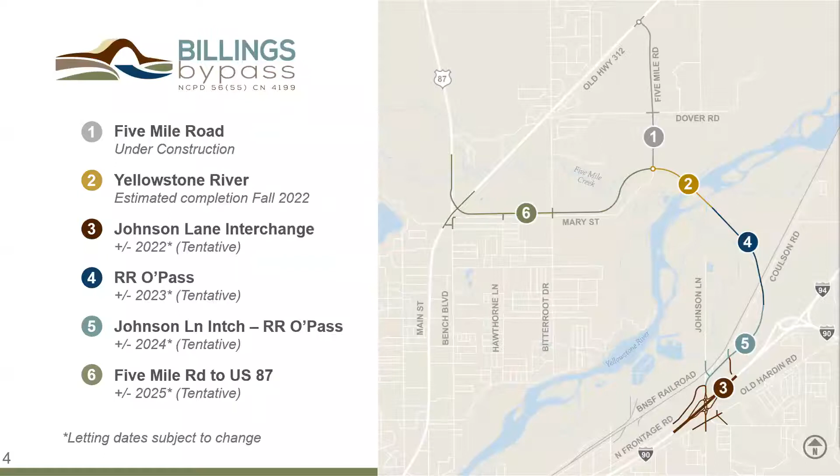As you can see on the screen, the Billings Bypass project consists of 6 individual segments of roadway. These 6 segments are planned to be constructed in the following order. Labeled number 1 on your screen is the reconstruction of 5 Mile Road and its extension to connect to Highway 312 to the north. This segment is currently under construction with Riverside Contracting and is expected to be completed and open to traffic this summer.

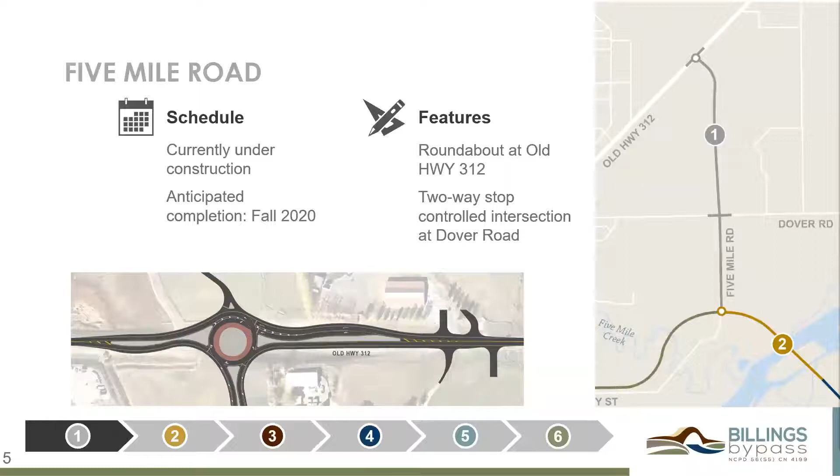The second segment to be constructed will be the Yellowstone River Bridge. This project was just awarded to Wadsworth Brothers for construction. Work is expected to begin on the bridge as early as this August and will take about 2 years to complete.

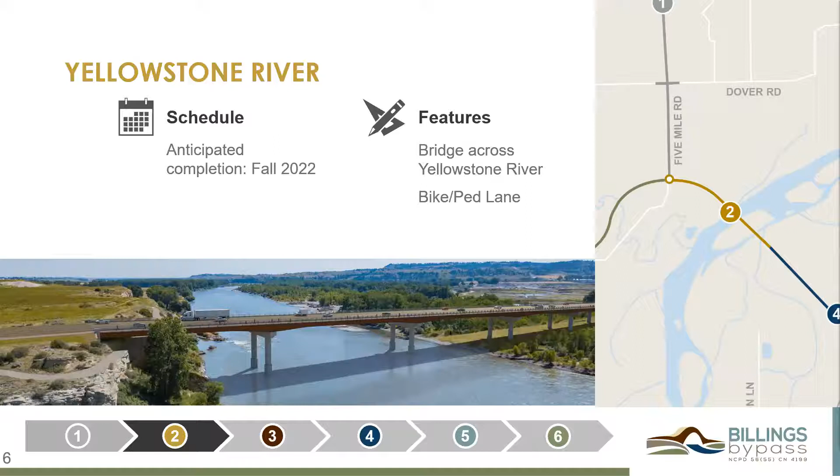The third segment to be constructed will be the Johnson Lane Interchange, with planned construction beginning in 2022. This project will probably last two construction seasons and will feature a diverging diamond interchange design, the first in Montana, but not the first in this country. Doug will speak in more detail on this segment in just a moment.

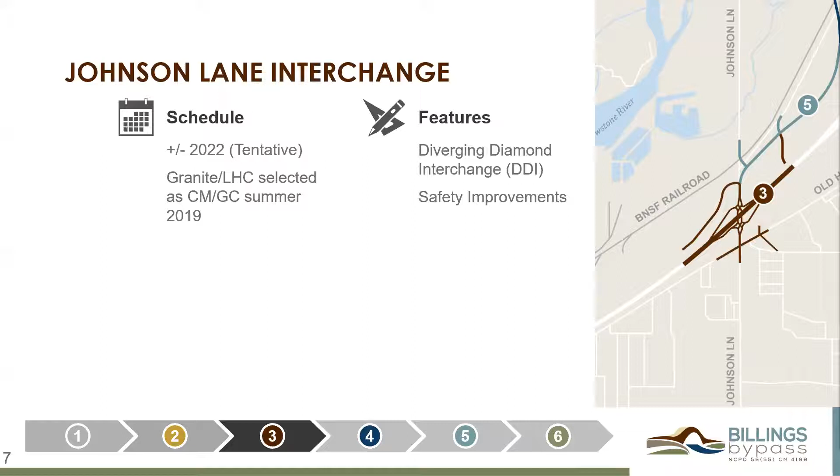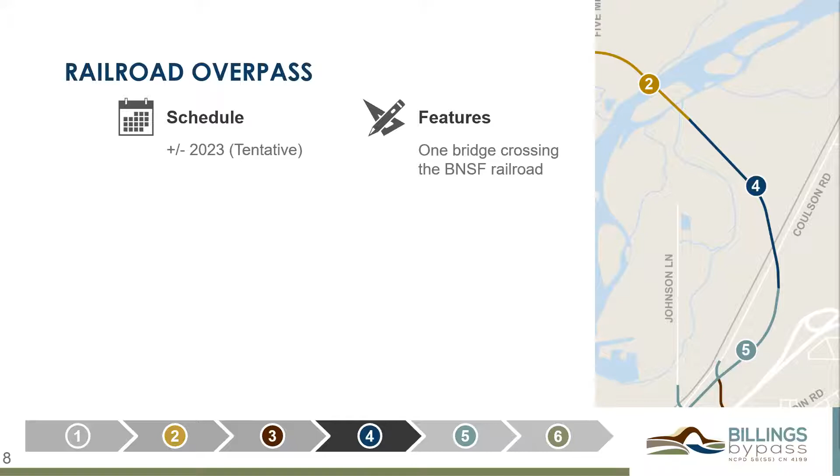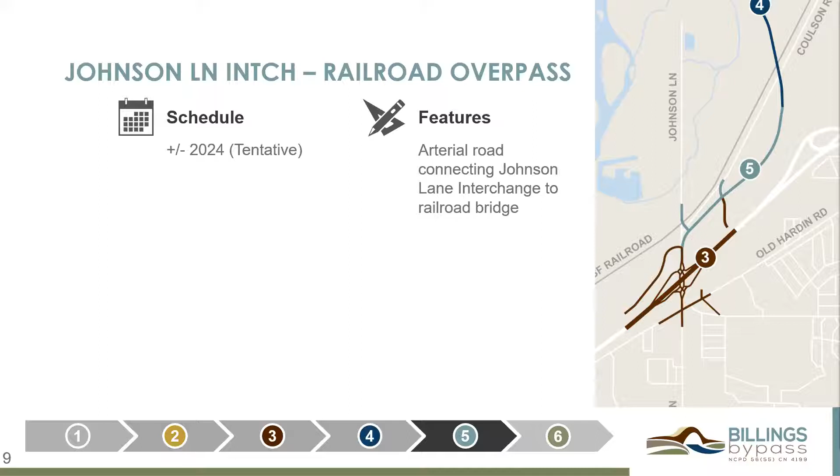The fourth segment is the railroad overpass. It begins on the southern end of the Yellowstone River Bridge and continues south with a bridge over the railroad tracks. We plan on constructing this segment in 2023. The fifth segment is planned for construction in about 2024, after both the Johnson Lane interchange and the railroad overpass are complete. This segment will construct the roadway between the Johnson Lane interchange and the railroad overpass.

And last but not least, the sixth segment. We plan on constructing the segment of the bypass that runs parallel to Mary Street between 5 Mile Road and the Highway 312-87 intersection on Main Street in about 2025.

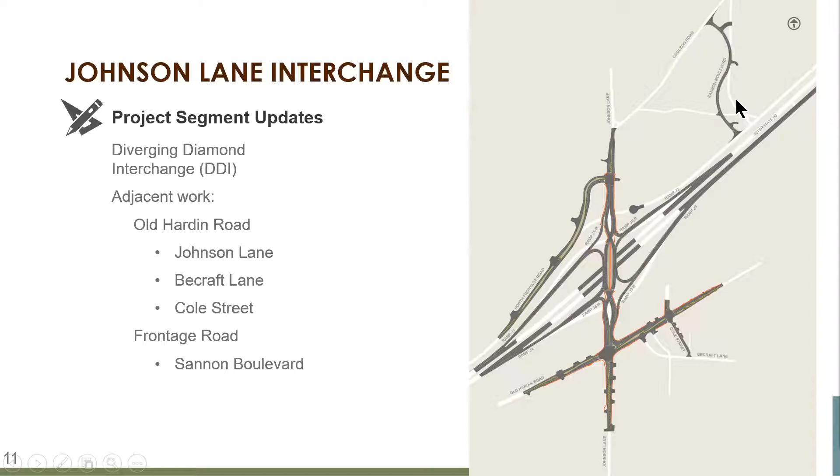We have heard a lot of comments about this proposal for this quadrant. We appreciate that feedback—that's exactly why we're here today. So any additional comments are more than welcome. We will be meeting after this public meeting about this quadrant further, and reaching out to those who have contacted us with final recommendations from there. Thank you again for your comments, and we'll continue to be in contact as we move forward.

Another major highlight of this Johnson Lane interchange is actually the way it's going to be delivered.

Traditional projects of this size are usually done through a design bid build process, which I would assume most people are familiar with, where construction plans are finalized, all the right of way is secured, all the environmental and utilities are out of the way, and then the project is advertised for bids from contractors. The department, MDT, would usually get a handful of bids from contractors, and a low bidder would be awarded the contract. Well, with this project, the state has elected to go with the CMGC process, which Rod mentioned earlier, which stands for Construction Manager General Contractor.

In some states, it's also called the Construction Manager at Risk. But really what that does is it allows the department to bring on a contractor who's more qualified than potentially a low bidder. So they actually procure the contractor through a qualifications-based process. They had to submit proposals, went through an interview process, and the best qualified contractor was on the team. And like Rod had said earlier, that's Granite Construction, and LHC is involved in the process. So that allows for more collaboration and innovation.

With this being an interchange with heavy traffic volumes, trucks, things like that, our traffic control and our construction sequencing is a major concern. And the best folks to provide that input during the design process are contractors. So that was why it was chosen to go the CMGC route with the project delivery method for this interchange.

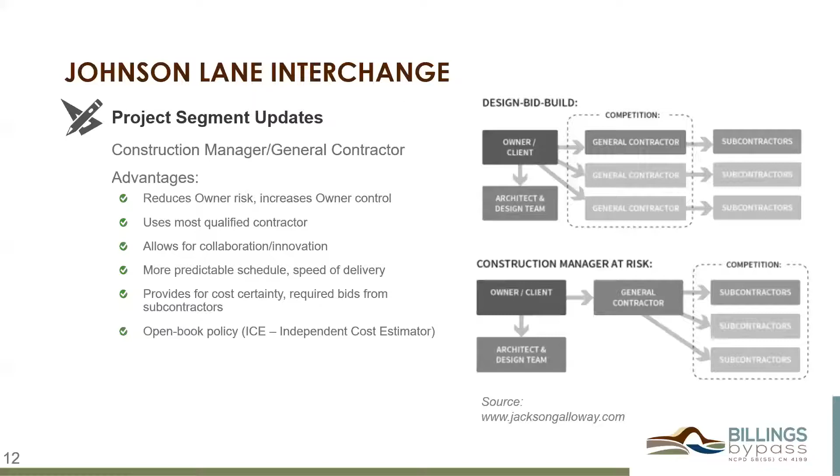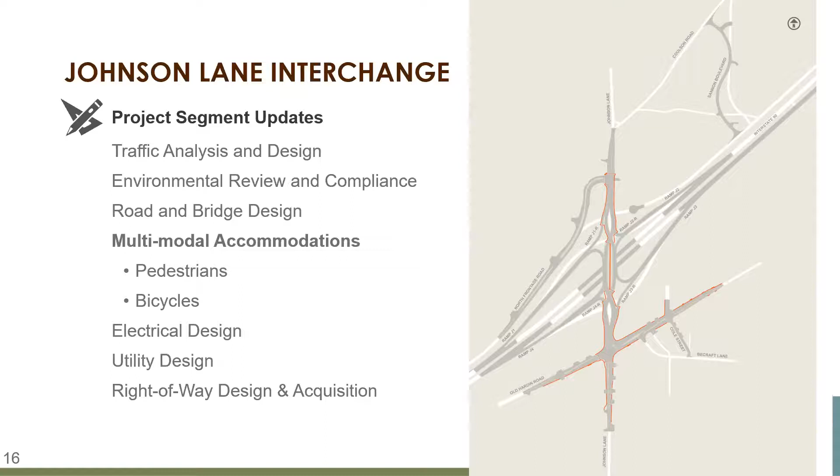We can't just think about cars and trucks out here - we want to make sure all users are accounted for. So we've been looking at making sure pedestrians are safe and cyclists can traverse through this segment. You can't see it well on this screen, but the red lines represent sidewalks. For folks along Old Hardin Road, there's quite a bit of sidewalk out there, though it's somewhat discontinuous with some gaps. We're going to fill all that in and make sure it's continuous within our project limits. We're also conscientious of the connection with the new path going in at Beecraft Lane, and we're connecting to that as well.

One thing I want to highlight is how we handle pedestrians in a crossover situation. Traditionally, sidewalks are on the outsides of vehicular traffic, which you see most everywhere. But as you approach the crossover, pedestrian traffic will be guided to the center median, and be able to traverse through the interchange through the center median, protected by concrete barriers.

So that an errant vehicle wouldn't strike a pedestrian. And most of the crossings, almost all of them, where pedestrians will cross ramps, will be at signalized intersections. So additional safety benefit there as well.

And cyclists too, there's two types of cyclists. There's folks that are comfortable with riding in the street. They will have shoulders and lanes so they can join traffic and traverse through the interchange, but also the sidewalks and the path through the interchange will be wide enough such that cyclists that aren't comfortable riding in traffic can get through the project limits safely and comfortably as well.

Jumping into what we call electrical considerations, there will be 9 new traffic signals out here with this new configuration. It seems like a big number, but it's probably what you'd expect after you see this graphic. I'm working from the north and working our way south.

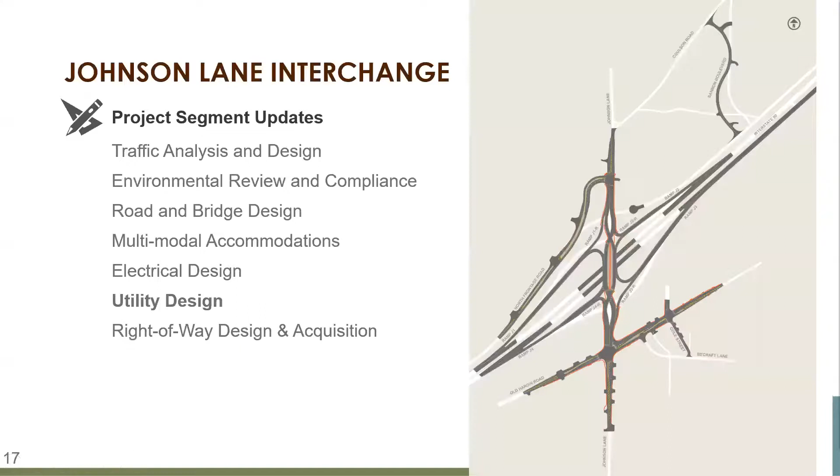For those familiar with the Lockwood area, I believe it's Ace Hardware that has a sidewalk in front of it on the west side. We're proposing to continue the sidewalk south and tie into that existing sidewalk on the west side. On the east side there is no sidewalk currently, but we will extend one through our project limits so that in the future, if Johnson Lane expands with other developments, that sidewalk can be extended through. So we are planning sidewalk on both sides of Johnson Lane to the south, tying into infrastructure on the west and providing opportunity to tie in on the east.

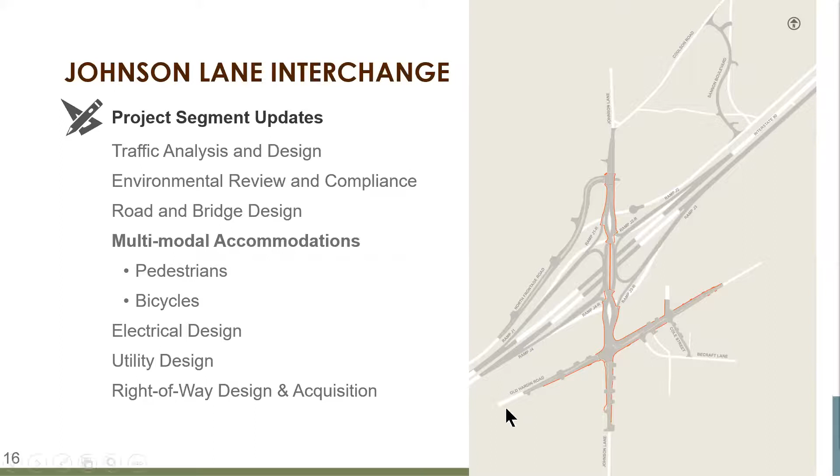Last but not least on this interchange segment is the right-of-way design and acquisition. Typically we try to get as far through design as we can so we can identify if and how much right-of-way we need, and that's close to where we're at now. We're hoping to have the design substantially complete by the end of this summer—not bid documents, but a good idea of the final design and construction limits—so that this fall we can kick off right-of-way acquisition activities.

For those along the segments of the map who may be impacted by construction, there will be teams from both DOWL and MDT reaching out to start those discussions. We anticipate, hopefully it goes quickly—there's a handful of properties we'd like to acquire to make this interchange work, but we're anticipating about a year to do that so we can begin construction in the spring of 2022. We're wrapping up the design and will be in close contact soon. Lisa has already reached out to a handful of you, trying to reach almost everybody we'll potentially impact, to invite you to today's meetings and start that conversation.

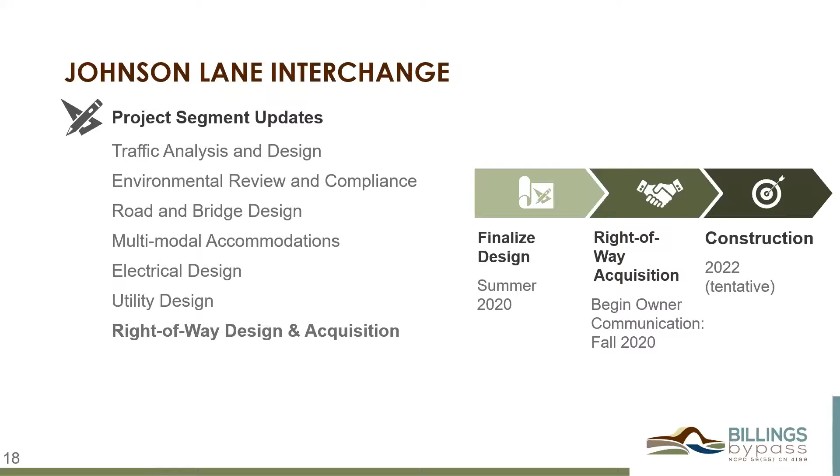That concludes the discussion of Johnson Lane Interchange. Again, please post questions in the Q&A and we'll answer them either live or get back to you after the meeting.

We have two other questions regarding Johnson Lane that maybe we could address before we move on. Sue asked, how will drainage be controlled in the newly lowered area under the interchange on Johnson Lane?

Great question. Drainage is always a big concern in roadway design, especially with curb that doesn't allow water to flow off the roadway, so there are a handful of elements going into this. We'll be installing inlets with pipes to drain out the system. You might think lowering the road creates a belly, but for those familiar with the 6th Avenue underpass in Billings, that's actually not the case here—there's quite a bit of grade, continually running downhill to the north, so we won't have a belly in the road design.

So it's traditional inlets and pipes. We'll use some of the median areas to store water as it conveys out. There's a natural drainage that flows through this area which we're perpetuating with pipes as well, so we don't want anyone thinking we'll create a belly requiring pumps and pipes, hoping the pumps work when it rains hard.

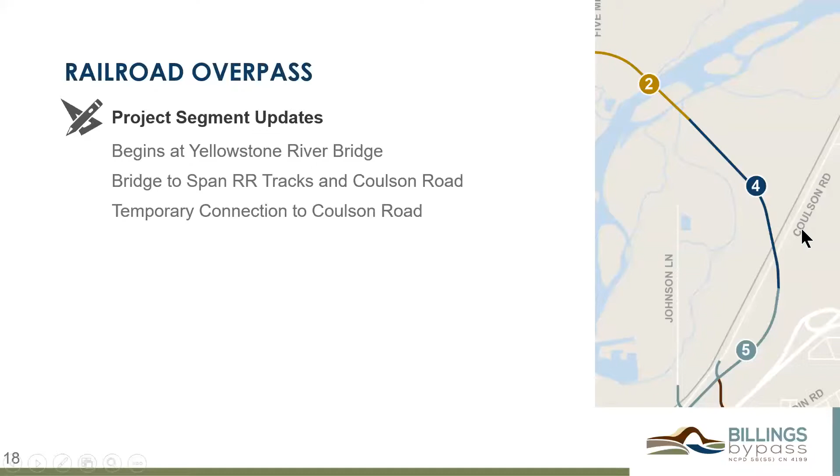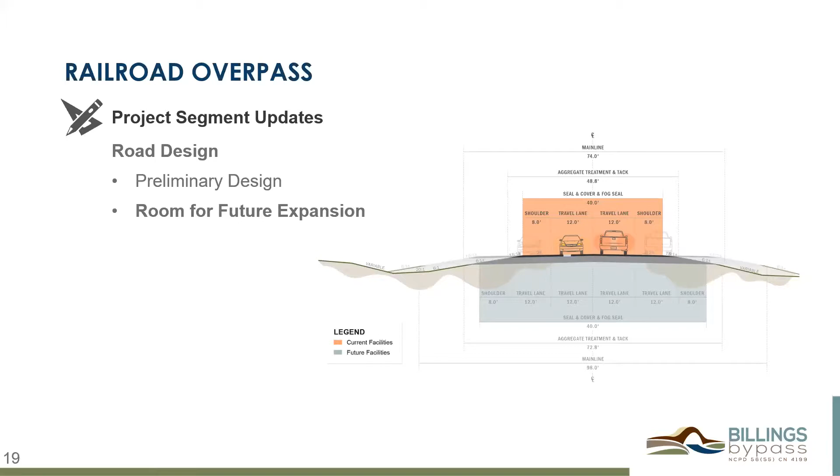For those familiar with the ground out there, the final elevation of the road will be about 8 feet higher than the existing ground. So if you're trying to picture what this will look like, that's basically it as it's running between the 2 bridges. Of course, once it gets on the bridge it has to go over, so it'll be much higher to get clearances over the railroad and the roads. But running between the 2 bridges, it's roughly 8 feet on average above the existing ground. The neat part of this one is the big structure that'll go over the top of the railroad and Coulson Road.

Another thing I want to mention about this structure: the record of decision that authorized this project to move forward with design has specific language about it. It said the structure was going to be built originally as a 2-lane, which it will be. But then as traffic volume elevates and traffic demands increase, an additional 2 lanes, a twin structure, was going to be built next to it. After careful consideration through our refined design, we realized it's actually going to be better if we build a 2-lane structure, but with a substructure, meaning everything below the deck, that can accommodate 4 lanes. So we wanted to share that we're going to build the bridge one time, with at least a substructure with 2 lanes on it and 8-foot shoulders.

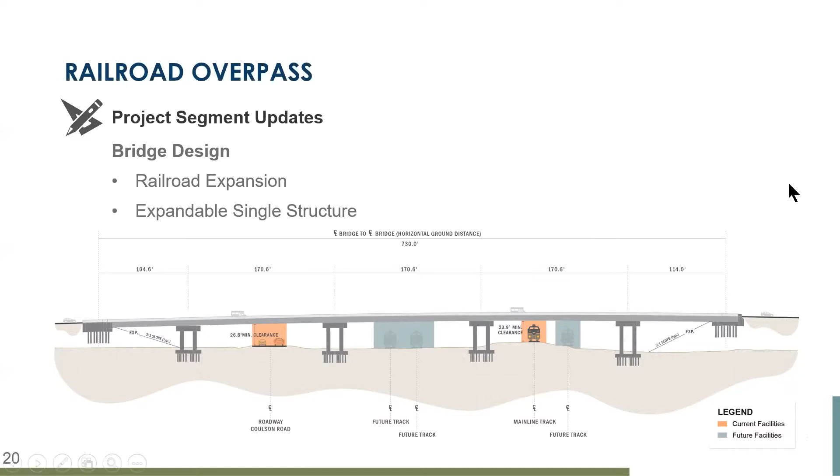We've been working with the TEDD Advisory Committee on any infrastructure needs they may have. One thing they documented was the potential for rail expansion so that the commercial industrial development park, if they have any need for that rail, has accommodations underneath our bridge, and we don't inadvertently constrict them. Little success stories like that are continually going on. As that develops, they may need water, sewer, and other things, so as we're tearing up the interchange, it's something they can plan for if they want to get some of their infrastructure updated as well. It's been an ongoing coordination effort with them, but generally positive to date.

And that concludes my updates on those two segments. All the other segments are in design phase, but these are the two that were on the forefront of our minds.

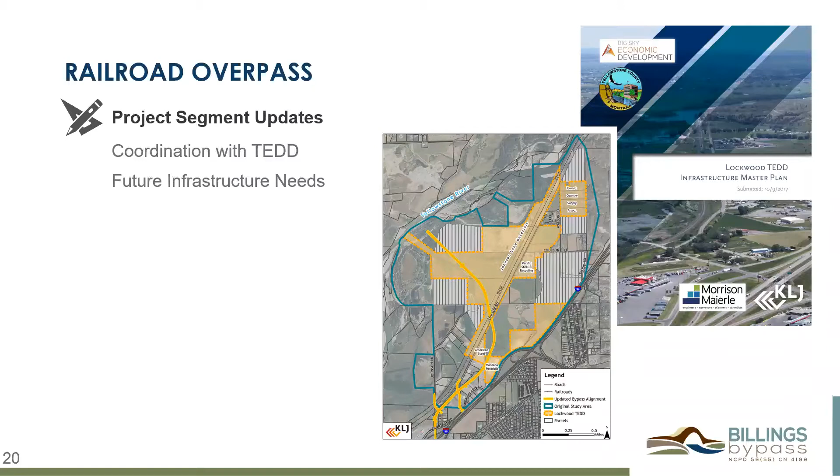Are there any questions? We do have one. Bryce asked a question that's partially private property related, so we'll follow up with you directly regarding that. But he also asked, how are safety concerns for EMS being addressed if there is a train parked across Johnson Lane, accessing those businesses north off the railroad tracks?

Good question, I failed to mention this too. The beauty of this railroad overpass structure is that it provides connectivity to the other side without being inhibited by a train. There is a private crossing currently on Johnson, which will be perpetuated, but there's also one farther north and east that will be replaced by this structure. It'll go right over the top, so that can be removed. The property owners on the north side of the tracks will have access to the bypass. So from an emergency services standpoint, that will likely be the preferred route, especially if there's a train in the area. They can get on the new bypass arterial, up and over the tracks, and down to wherever they need to be without much delay, hopefully a lot less than waiting for a train.